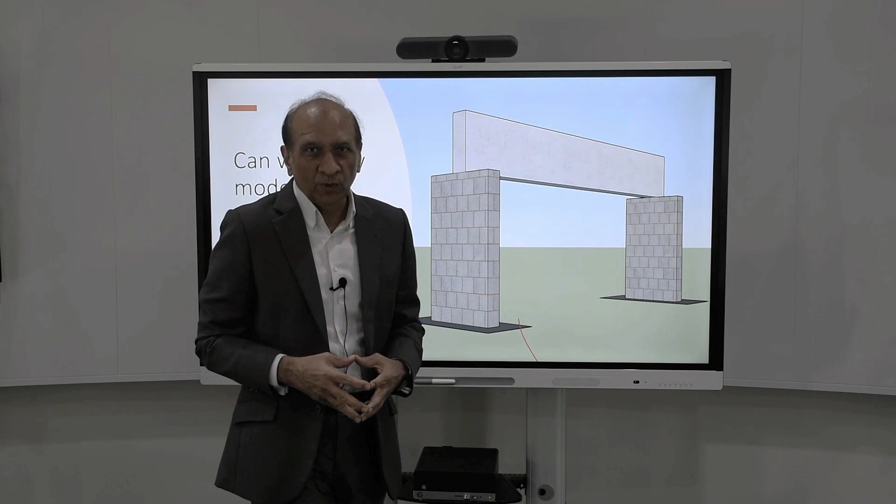You might say you don't need analysis or modeling to determine the response of this structure. I can do it by hand, by WL squared by 8 or WL by 2 or something like that. Completely true - we don't need computer modeling to solve this problem. But let's say if we had to model this structure completely and properly, what would be the challenges?

First of all, we would like to model this structure realistically and calculate its behavior for different excitations, not just for vertical load. So let's see what we are talking about in that context.

So basically, we would like to represent the materials realistically. Now this is a reinforced concrete beam - we have rebars in there, we have the two different materials put together. We have a masonry wall, which is made of brick blocks with mortar in there and so on. We have the supporting system, foundations. So can we model all of those materials realistically?

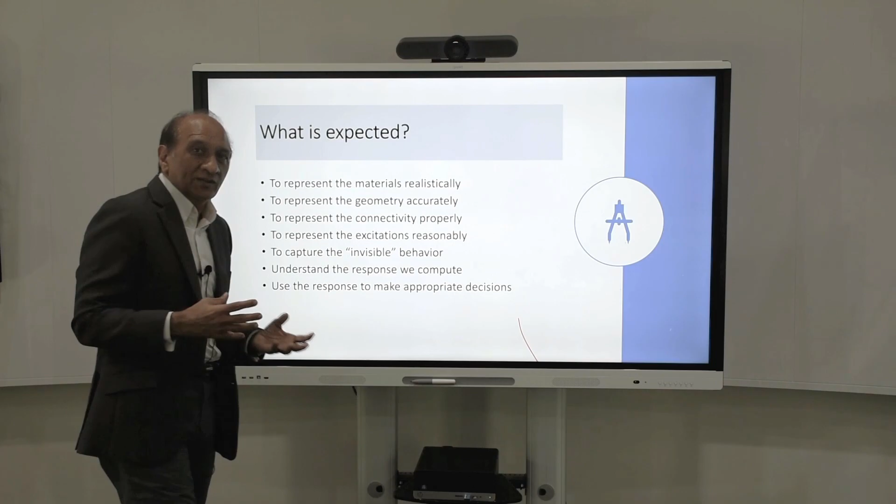Can we represent the geometry correctly, realistically? That means it captures the behavior. Can we represent the connectivity between these elements? How is the beam resting on the walls? What is that connection?

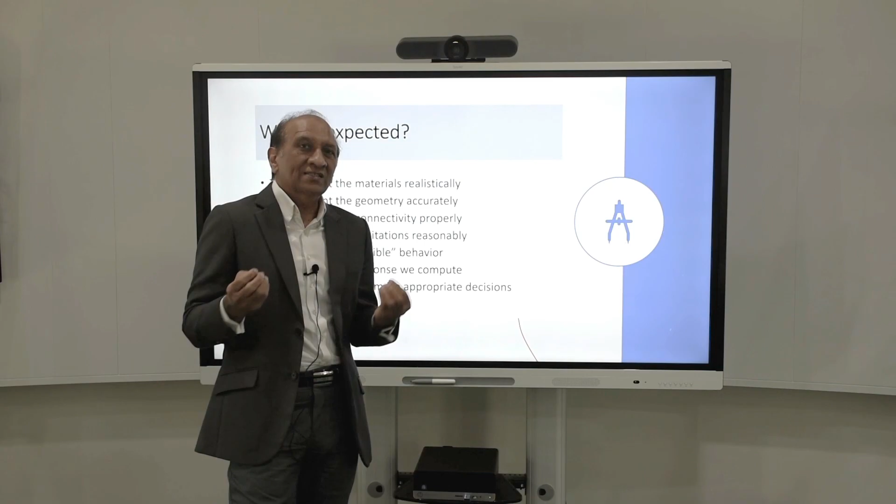Is it pin? Is it roller? Is it spring? What is it? How do we represent that simple connection where the beam is simply resting on the top of the wall? How do we capture the invisible behavior, like friction between the wall and the beam, or the sliding of the beam, or falling off of the beam? How do we do that? And then how do we understand the response that we will compute and make some decisions that are useful?

So let's get into it. Let's see, number one, the simplest case: where we have a vertical load on the beam, and how do we calculate the response for a vertical load? That is obviously the simplest case.

What anybody will do is take this beam and put it on a roller and a pin support. They will model it like that, apply the vertical load, and then easily calculate the bending moments and even deflections and shear forces and all. There doesn't seem to be any problem with that. But look at the first problem.

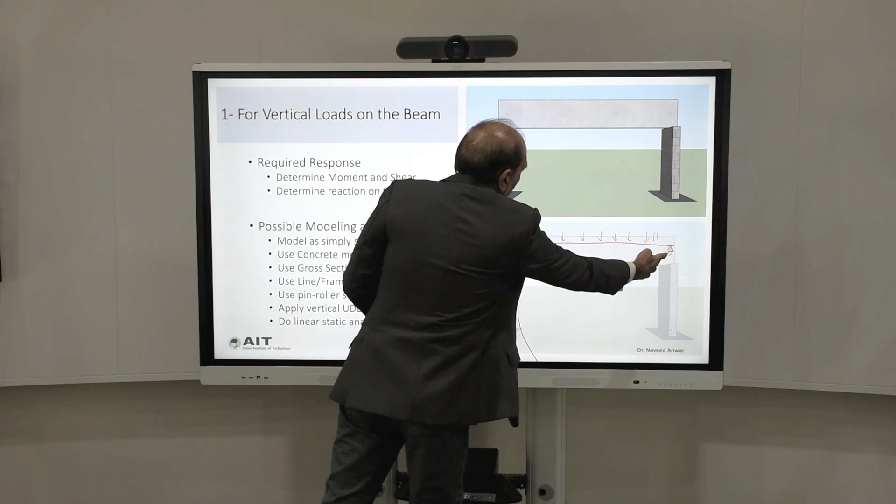When you model it, you model the center line of the beam, which is actually far from the real support of the beam. It's not the same location where the beam is in contact with the wall. So you're modeling a beam center line which is already away from the real support, and that will start creating problems in our modeling.

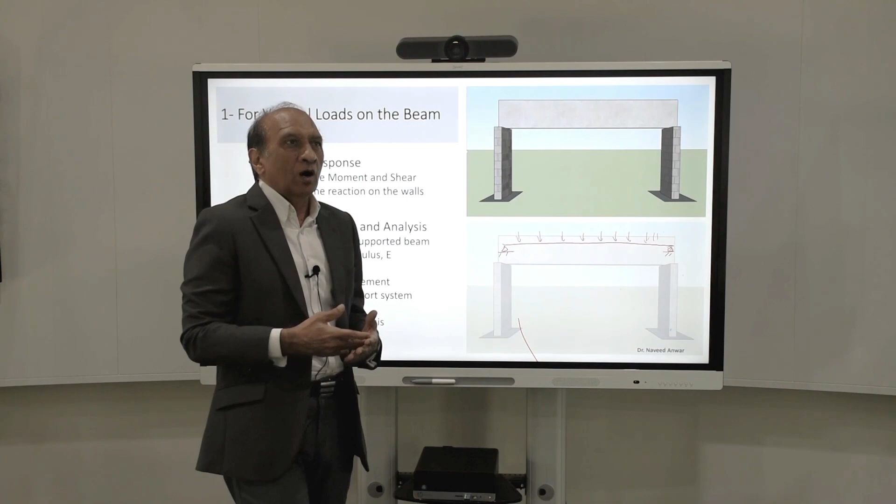But okay, let's forget that for a minute, and we can do this model and get the response for the vertical load. So we use the concrete modulus of elasticity, use average modulus, neglect the rebars, just assume it's concrete. And we use the initial elastic modulus, or tangent elastic modulus, or do we use the secant elastic modulus? There are many options there, so we have to make a choice on which elastic modulus we will use even at this point.

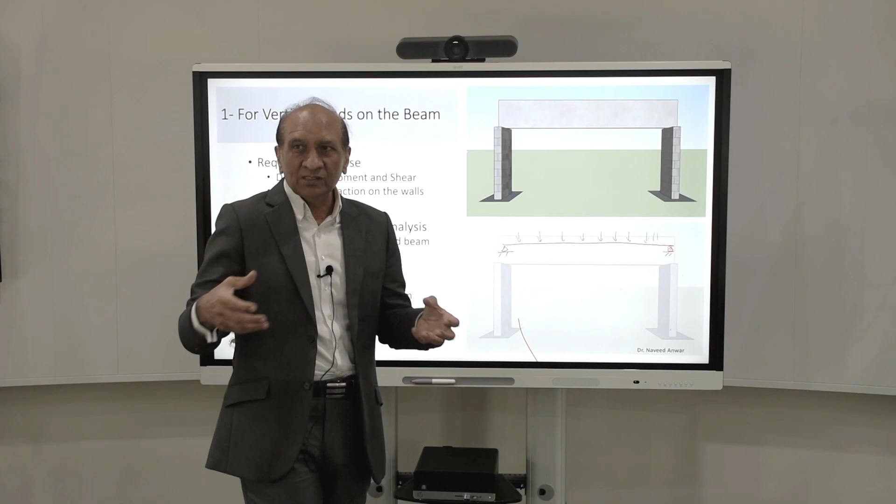And then do we use gross cross section, or do we use the cracked section? Because when you apply the loading, the beam will crack, and the cross section will change along the length. It will crack more in the middle, less close to support. So which cross-section properties should we use for calculating the response, the deflections, for example?

Let's say we use the line element or a frame element to model this one, and like I said, we put it on two supports, one roller and one pin. Which side should be pin and which side should be roller? Because in reality, both the supports are identical. The beam is just resting on the wall. So you are arbitrarily saying that one is pin and one is roller. Which one is which and why?

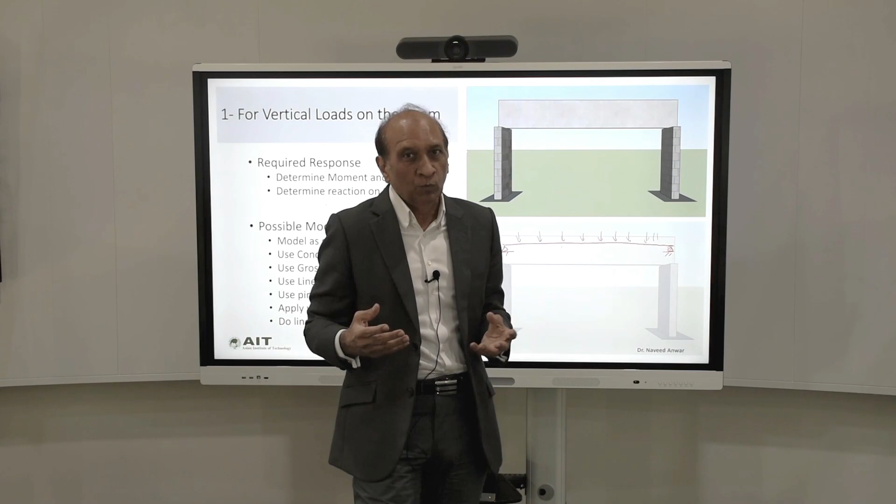So we'll come back to this again. Then we apply a vertical load with a UDL. Again, whether it is applied at the top, at the bottom, or the center line, that's a question, but let's say we assume it is applied at the center line. Then we can do a linear elastic analysis and get the response. It's a simple thing, but as you can see, we already raised many questions here.

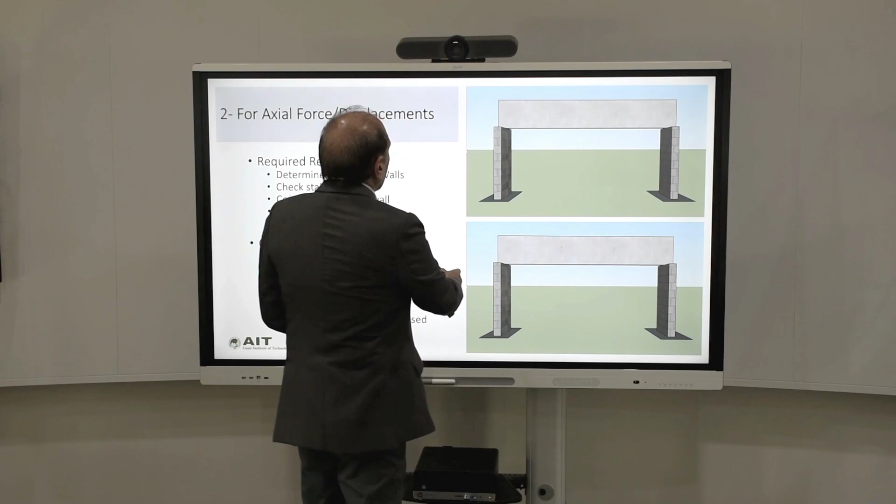Let's go to another case, next step. Let's say that the load is not vertical. Let's say now that the load we are talking about is actually a horizontal load or a horizontal displacement. For example, there's a load coming from this side because of any reason, maybe it's earthquake movement, or there is a temperature change, or there is shrinkage in the beam, so it is causing deformation in the beam, axial shortening or expansion. Now what do we do?

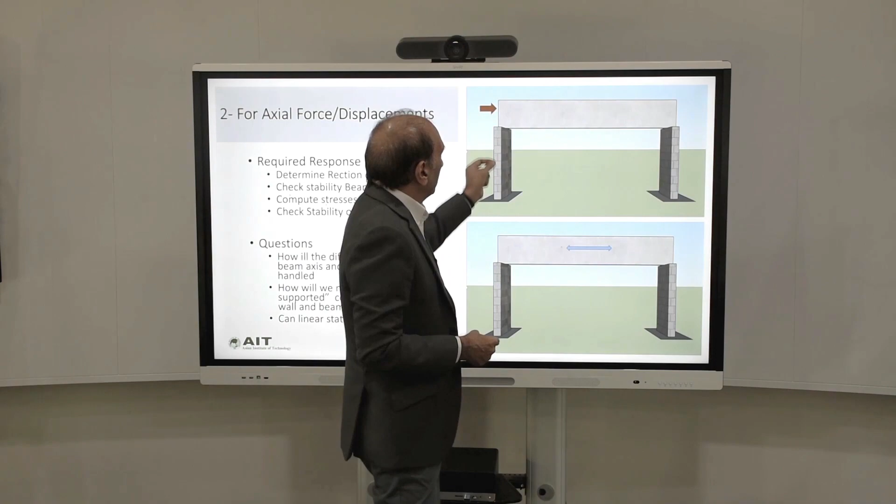Will that model that we just made work? For one thing, if we use the pin and roller condition, then if we have a pin on this side and apply the horizontal load, that pin will absorb the load and it will not go to the other support. But we know very well that the horizontal load from this beam should be shared by the two walls. How will that happen? How will we model that? If you use pin here, roller here, then we already are in trouble.

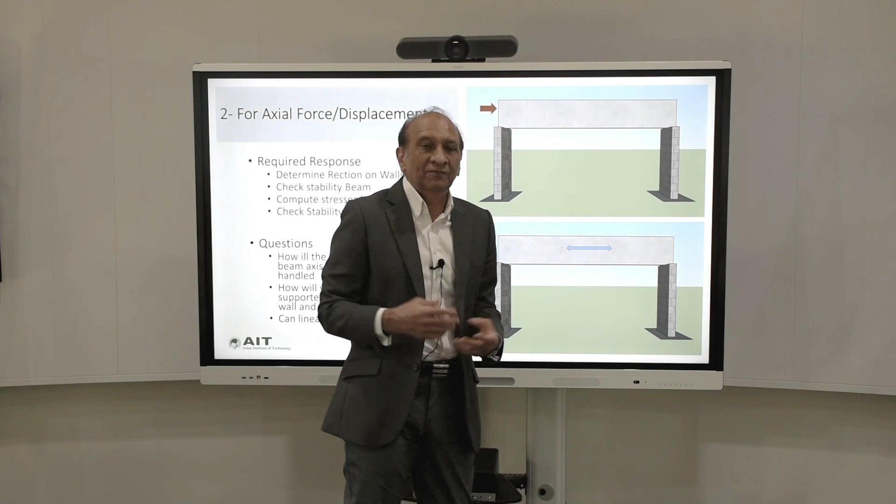If we use both rollers, then we again are in trouble because the beam will simply slide off the walls and we will not get any reactions. What about when we have thermal expansion? Then the beam is supposed to expand on both sides. What will it do to the wall? What kind of reactions will be induced? So will the walls provide enough restraint or will they not?

So all these questions start to come up when we simply change the direction of the loading from vertical to horizontal. And now we cannot really model in a very simple manner without making several assumptions. Let's go one more step.

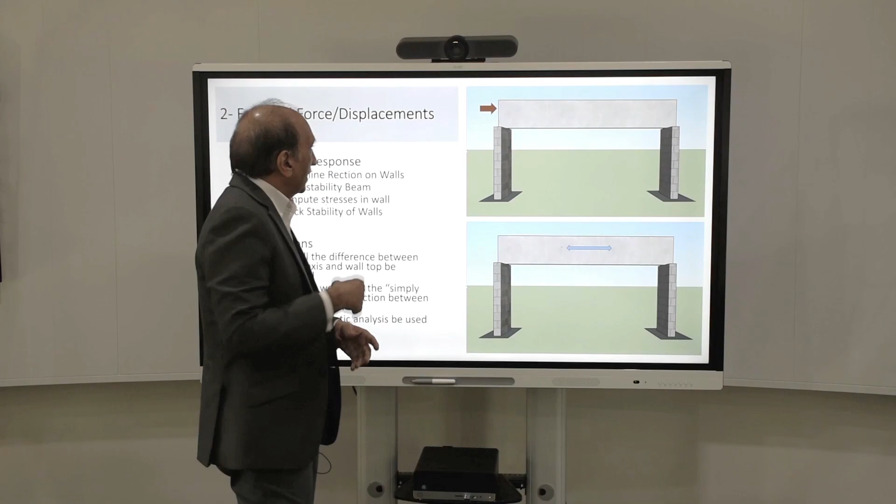Let's say the beam is like this one, we're looking from the side, and there's a wind blowing on that side, actually trying to topple the beam. So there's wind pressure coming from the side.

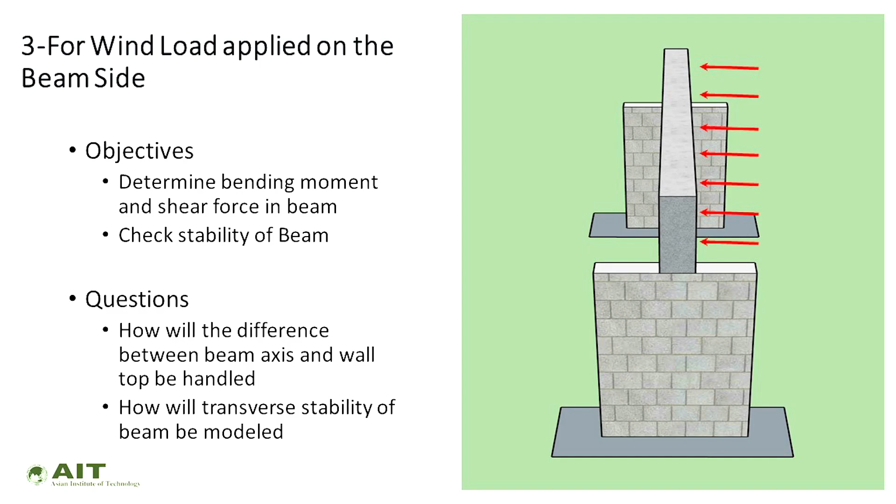Now we have a completely different problem to solve, because the centerline model we made last time may not be relevant anymore. The beam centerline is here, the support is here, so we have a gap in between. Also in reality this beam might topple and overturn over the wall, but our centerline beam model will never tell us that can happen, because it represents the beam at a centerline supported on both sides, so it cannot topple or rotate that way. Even if it can rotate, it can only rotate about the centerline, not about the top of the wall, which is far from the centerline.

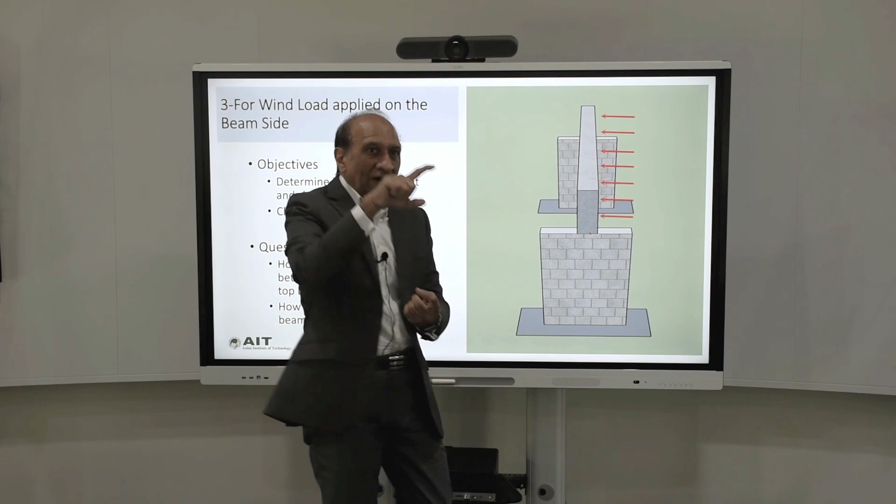So that means our traditional simply supported roller-pin model will not work in this case, and we need to go beyond that. There are several issues that have come up just because we changed the loading. That means we cannot use the same model for different loadings, which should not be the case. In an analysis program, when you make a model, you apply different loadings to the same model, but in our case we can see that it will not work.

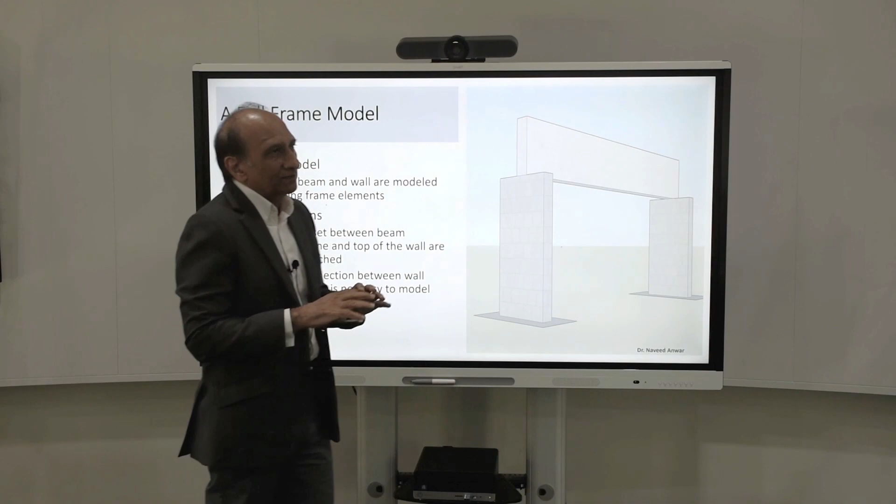Let's say we realize that a simple centerline beam on roller and pin support may not be sufficient. Then what options do we have? Let's go to a computer program and model it as a frame — representing one wall as a vertical column, the other wall also as a vertical column, and the beam as a frame connecting them.

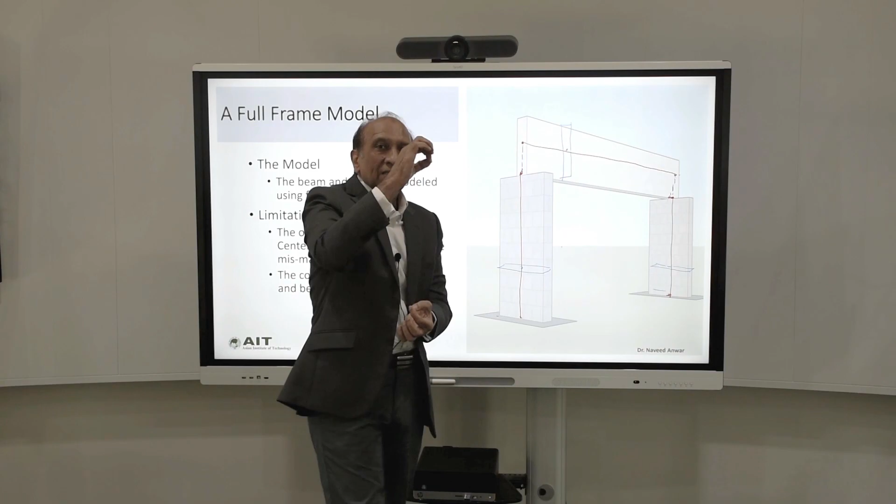But the first problem again is that the beam will be modeled at the centerline, while the walls end here, so there's going to be a big gap between the centerline of the beam and the supports where the beam is actually resting. So we have this offset between the centerline and the supports, which creates a problem.

Either we lower the beam down so the centerline comes to the top of the wall, or we raise the walls up to match the centerline. Both of these are incorrect because they alter the physics of the structure. That means our frame model now has some challenge.

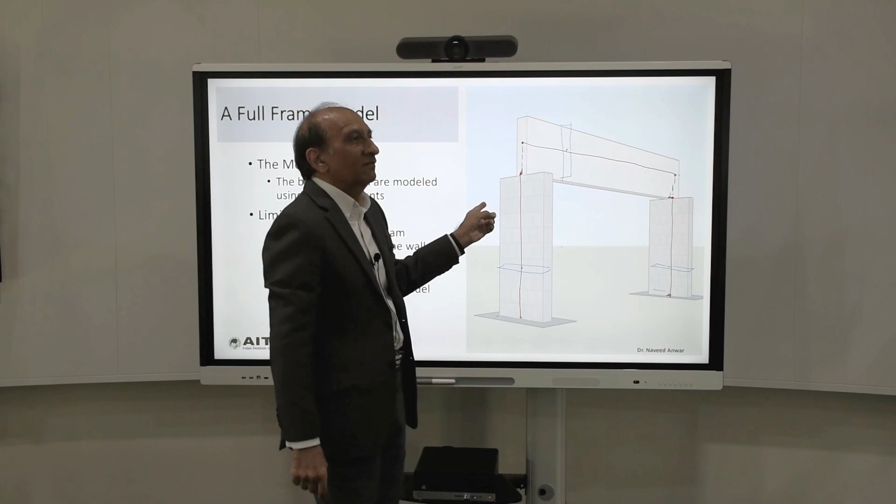Obviously, there could be many ways to solve that — we'll come to that in a minute. But you can see that even creating a simple frame model for this example runs into trouble right away.

Let's go to another option, a frame-shell model. If the wall is very long, instead of representing it by a column, we can create a shell model of the walls to make it more realistic, while the beam is still represented as a frame, and then we try to connect them.

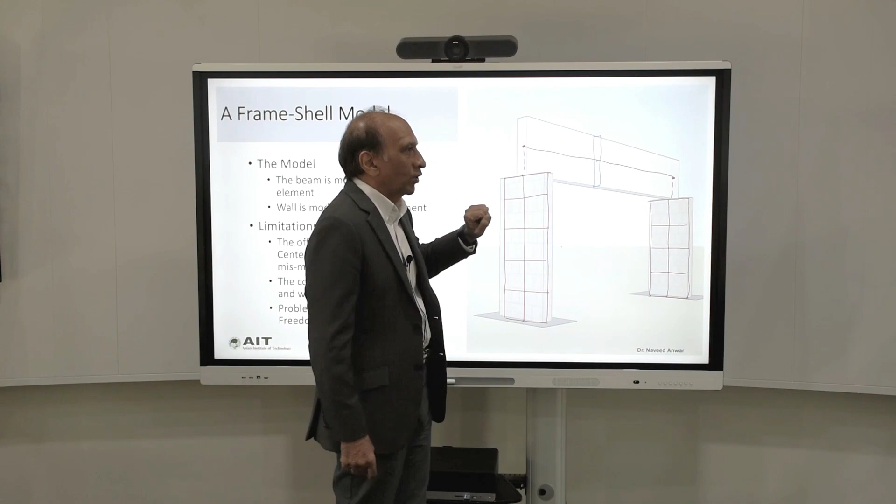But that does not solve our problem, because there is still this difference between the beam centerline and the top of the wall. That gap is still there, and we need to do something about it. This model will be slightly better for the walls, but it doesn't solve the problem for the beam, and especially doesn't solve the connection between the beams and the wall.

But at least now we know we have an option of doing a simply supported single member, an option of doing a frame, and an option of doing a frame and a shell.

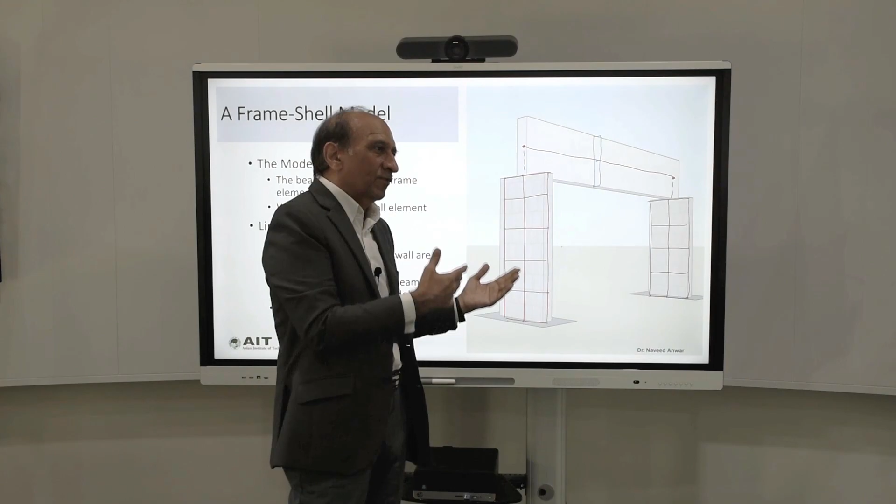Let's say we want to create a complete shell model. Another option is that we go one step further, and we say we will represent the wall, which is a planar structure, by a shell element. We will also represent the other wall by shell, and we also represent the beam as a shell, because the beam has a depth, so we can model it as a shell.

Now we have solved a few of the problems, because the first problem we solved is that the connection or the support of the beam is now actually on top of the wall. So that gap problem or geometric inconsistency has been resolved, and we can place the beam exactly where it is and model the geometry reasonably.

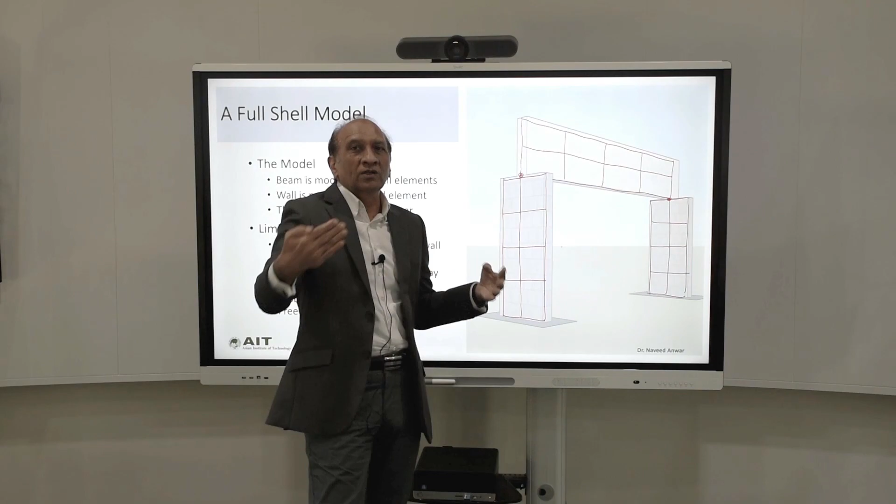But several other problems we have not solved. We have not solved the problem of the gross cross-section of the materials, and we haven't solved the problem of the connection between the beam and the wall yet. But geometrically, the model has started to look better, right? And we can have a good physical sense of the structure.

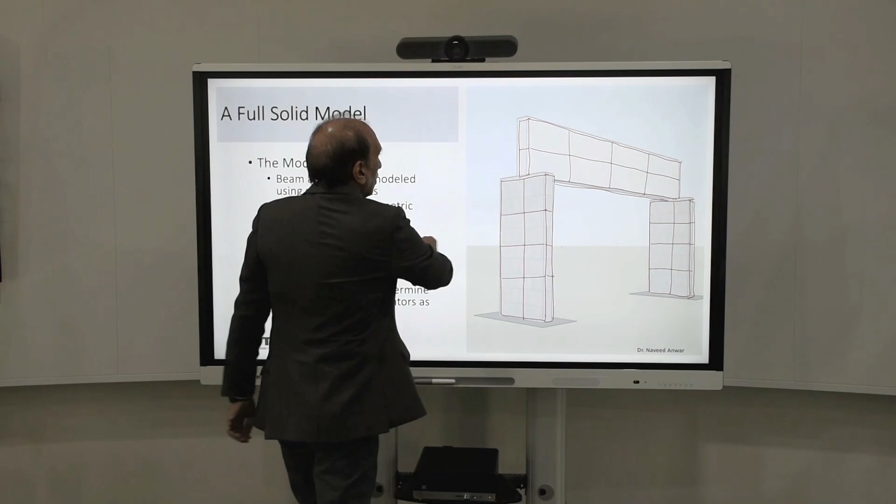Now let's go to the next step. We say, let me model the whole thing as a solid, because in the previous model, if I go back, we still have a thin shell resting on the wall, and it doesn't have stability in the transverse direction because of something called the orphan degree of freedom problem. When the degrees of freedom of one object do not match with the degrees of freedom of the other, some degrees of freedom are orphaned, so the connection will not be fully established.

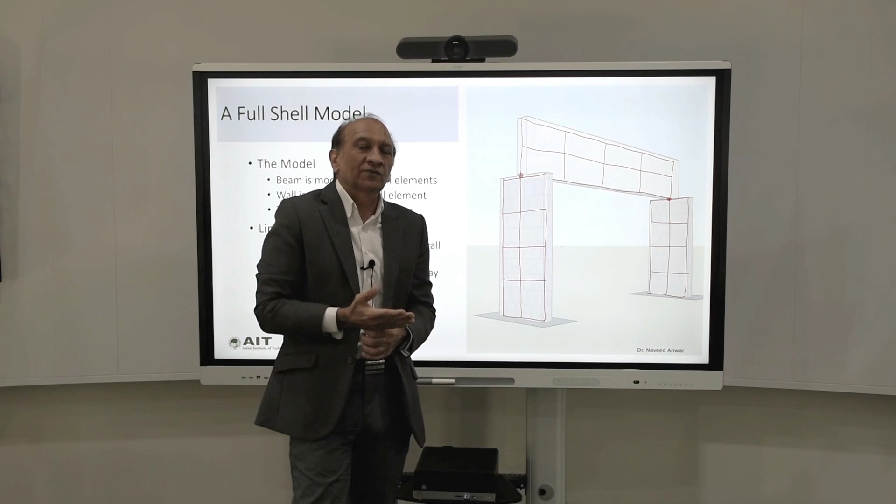So to solve that and other problems, we could say I'm going to model everything as a solid element. In fact, mechanical engineers normally always model their structures as solids because they physically correctly represent everything. But in civil and structural engineering, we normally make a lot of assumptions and simplify the structures. So now we have a solid model.

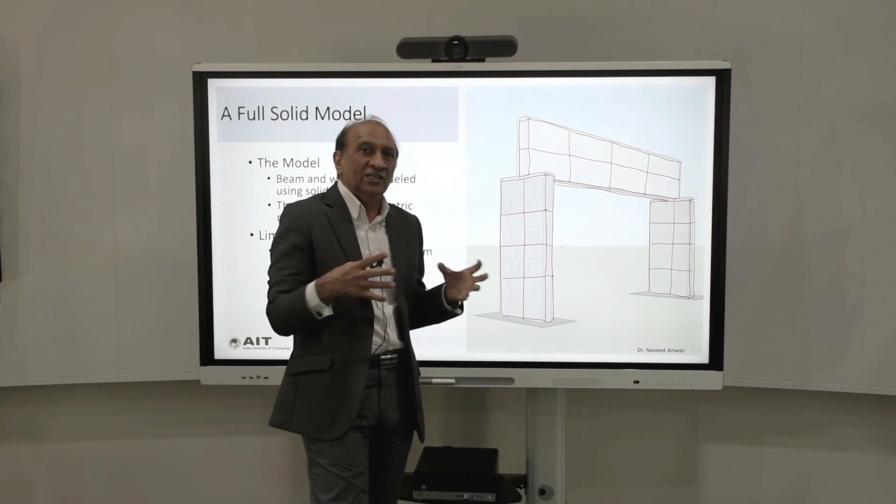That means the wall is physically correct, the beam is physically correct, the beam is really sitting on the wall at the correct location, and the dimensions are now correctly modeled. If the beam is wide, it will be more stable; if narrow, less stable, and so on. Same is the case with the walls. So geometrically it's a very good model because changing the cross-section will not change the results or the assumptions—it will just be correct.

But the problem of the connection between the beam and the wall is still not addressed. And another problem we've now created for ourselves is that it is not easy to calculate the bending moment in the beam anymore, because the solid element will not give us the bending moment and shear as we normally get from a frame element. Now we only get stresses, and those stresses have to be integrated and converted back into bending moments, and they aren't useful for reinforcement design directly.

We will have to do a lot of processing to get a sense of what reinforcement we need. Also, it will be very difficult to induce cracking or incorporate reduced stiffness into the solid model, because in a beam we can simply modify properties by changing the property modifiers in shear, torsion, axial, and bending independently of each other—there are 6 stiffnesses we can modify to get the behavior we want. In a solid, we don't have that opportunity anymore.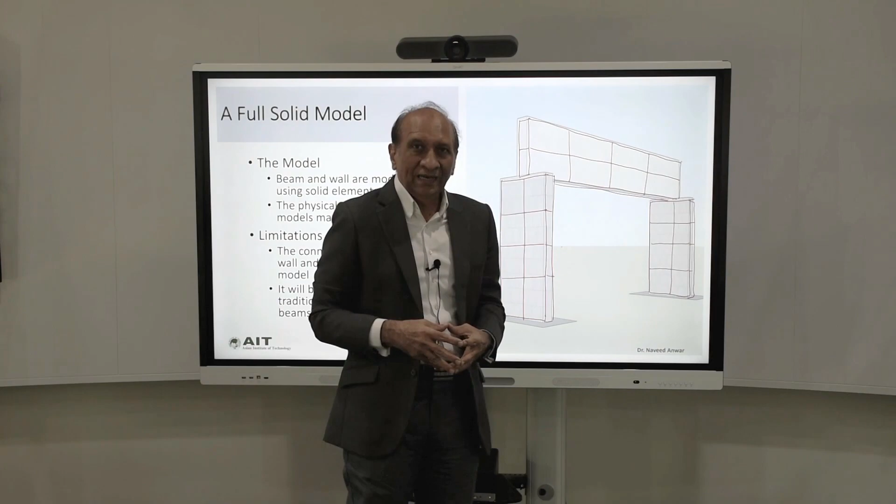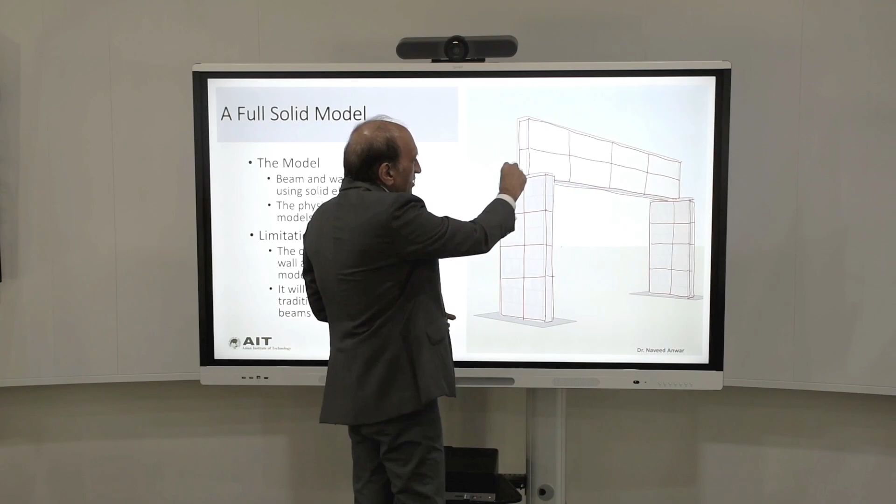It's more or less complete. So even though we solved the problem of the geometry, we created problems in result interpretation, and also in modeling the properties or modified properties. So while each model gets better in one direction, it gets worse in the other. And especially we haven't solved the problem of the connection between the support and the beam, because if you just connect it rigidly, the results will be very different from what we really expect.

So if you look at that in SAP, for example, you could make different types of models for the same thing. This is a simple beam—I represent it in an extruded form. This is a beam centerline on wall, beam on shells, and then different models of shell on shell and full solid models. You can create them in SAP if you like. For this simple structure, we can have several options, each with some disadvantages, and they can all handle some loading and cannot handle some other loading.

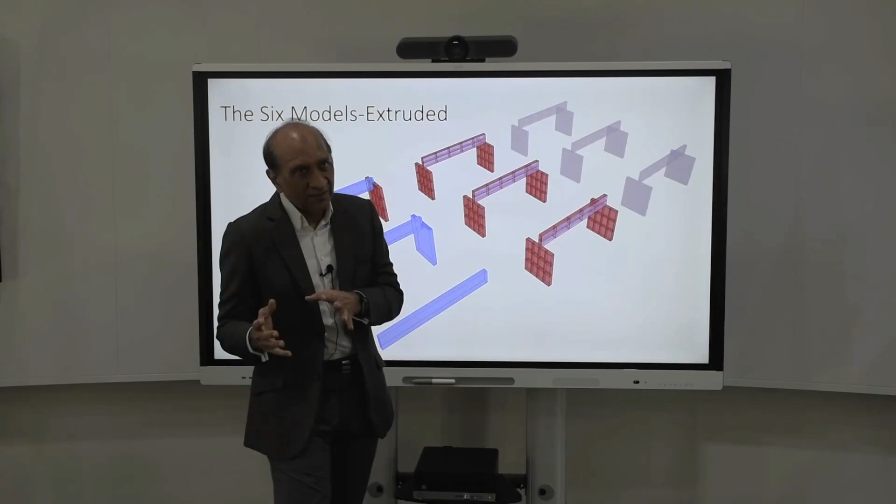So none of the models is actually really solving the problem that we started with, and we started with a very simple problem of a beam on two walls. What can be simpler than that?

What we have learned so far is that even with a simple problem, it is very hard to model everything as we want, unless it's a thesis or master's thesis where we're only doing this for 6 months or 1 year. But in a design, we have very little time to do that.

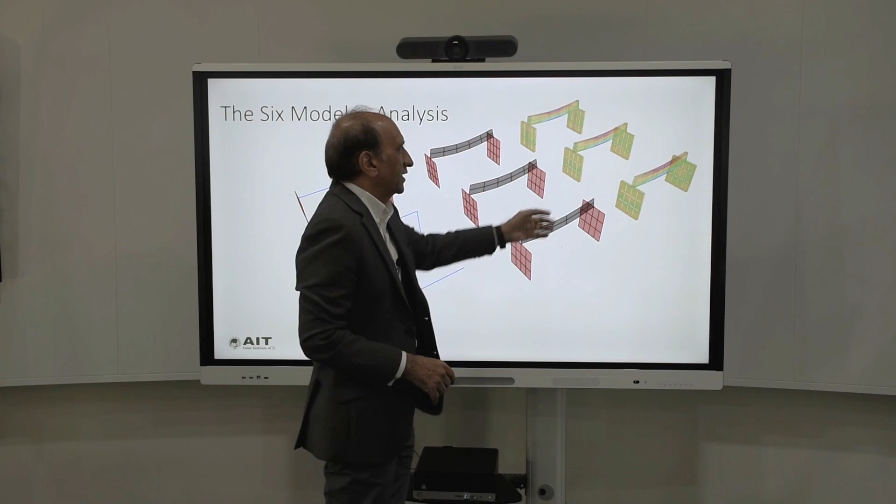If you just look at the models, they will all have different responses. Some will give you bending moments, some will give you stresses, and you can see solid models of different kinds where we try to solve many problems of the beam going to the end, not going to the end, and so on. If you look at one parameter, the deflection in the center of the beam, in different models you get different answers.

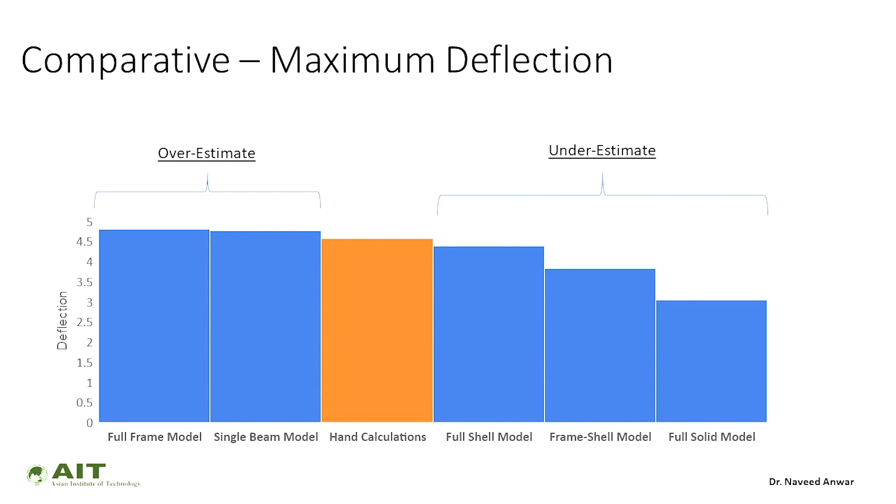Every model is giving you a different value of the deflection in the middle. If you just use the manual calculation, some are higher, some are lower, and the variation is quite big. So the question is, which model is right?

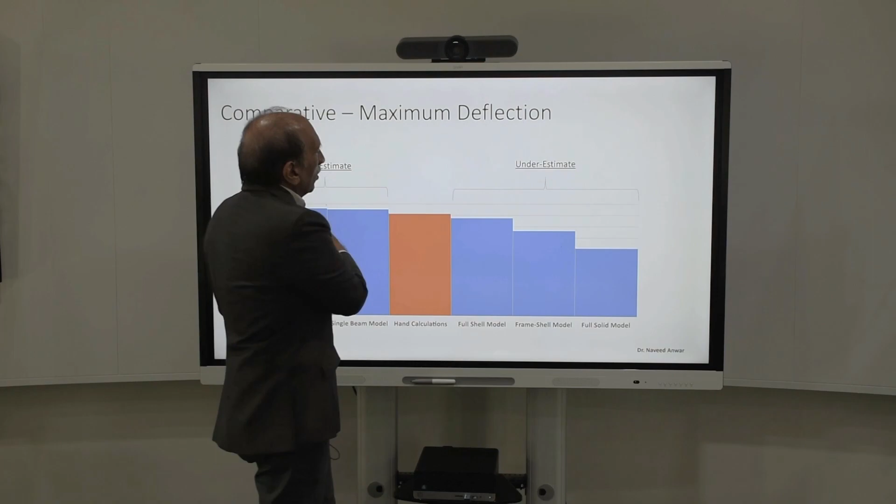In this particular case, actually none of them is right, because in the deflection of reinforced concrete, we have to incorporate the cracking and the effective stiffness because of the reinforcement, and we have to incorporate the long-term loads, the shrinkage, the creep, and so many other things that none of these models can handle so far. We might get some of the forces right, but we didn't get the deflection right.

We didn't solve the problem of the connection between the beam and the wall yet. We only have a few options: either it's a hinge, a pin, or a roller, but the real connection is a sliding member resting on top of the wall. So how do we do that?

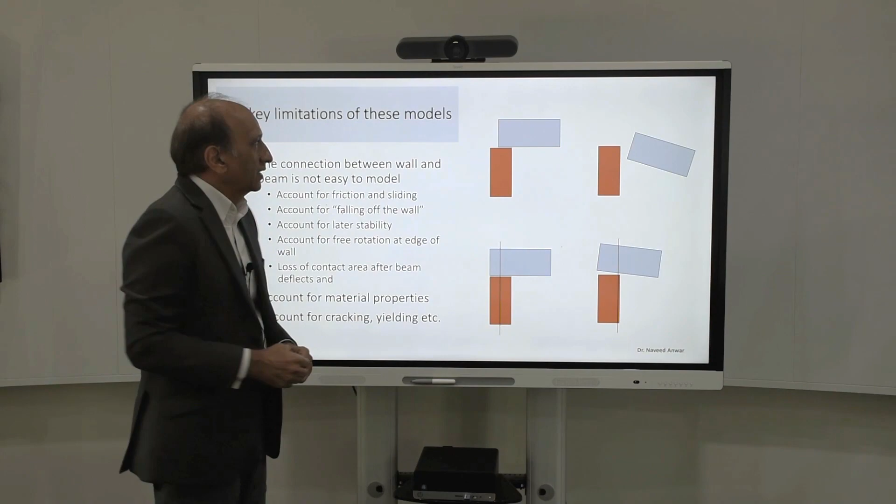That brings us to some other problems we actually did not solve. First of all, like I said, the beam can slide on the wall, and we didn't incorporate that in our modeling - sliding, friction. The beam can actually fall off from the wall, but our models will never show us the beam falling down, no matter how much load we apply. The beam will always be resting, always be connected, unless we use really advanced modeling.

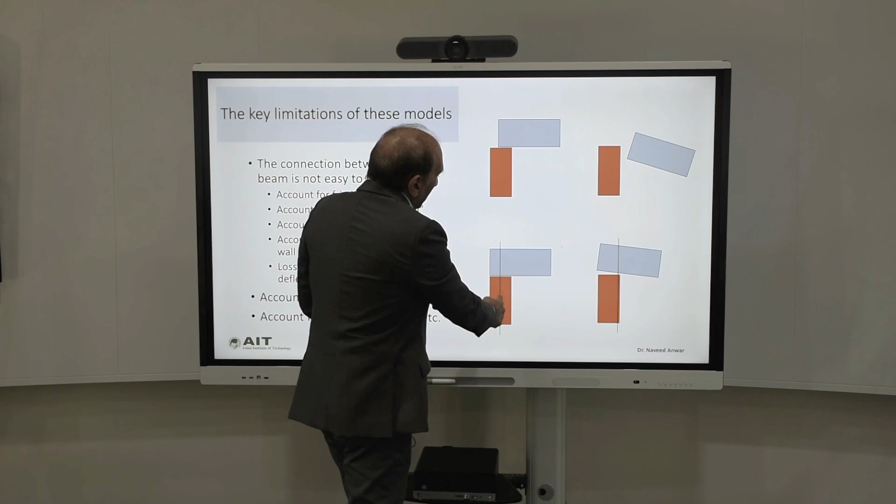Then the other problem is when the beam rotates, we assume that the beam is resting on the centerline of the wall, but actually when it rotates, it's on the edge of the wall, not on the centerline. That means the span we assumed is also not correct. And that rotation at the edge of the wall will change the reactions, not from the centerline but to the edge of the wall. We just didn't capture those things because we assumed we were modeling at the centerline, with a pin and roller at the centerline.

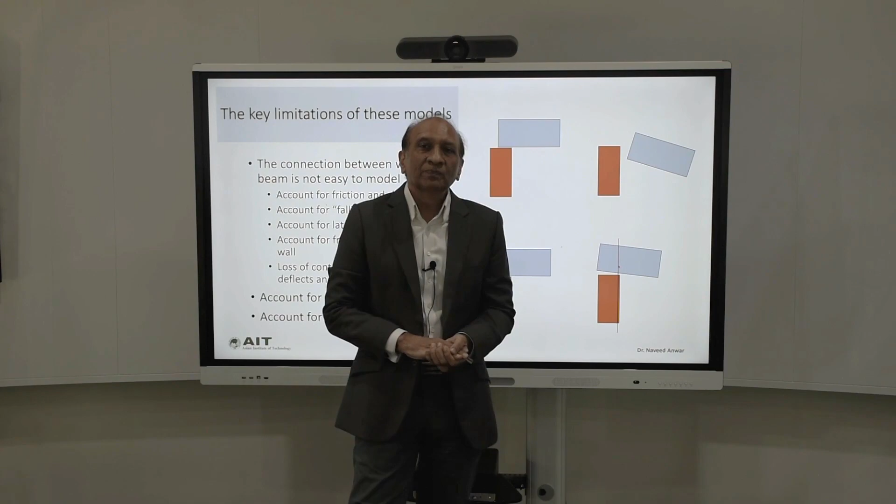If the wall is very wide, this could be a big difference. Let's say the wall is half a meter on each side - your span estimation will be off by half a meter. Deflection, moment, everything will be off by that. Some people will use clear span, some will use centerline span, but what is the real span, we don't know. The stresses around the edge of the wall could be very high around this area, and this whole sliding behavior here we have not been able to capture properly either.

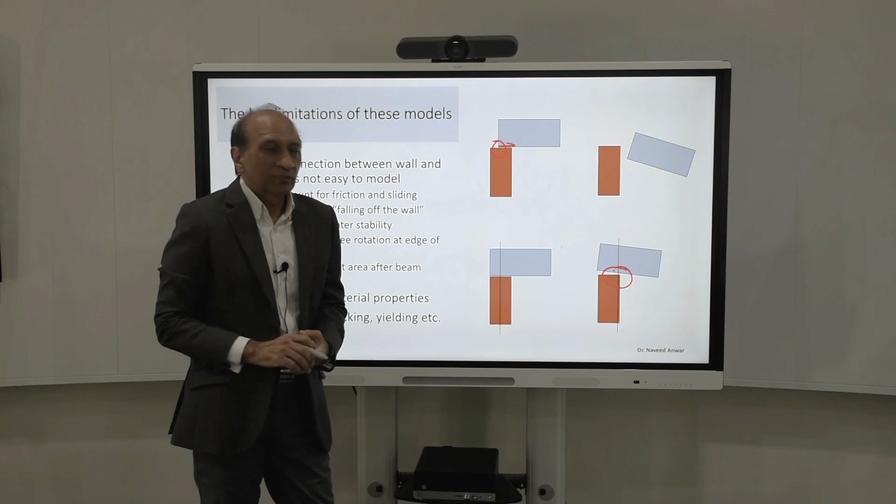To solve these problems, we have what we call behavior elements. Because we could not solve this problem by physical modeling - no matter how fine we made the modeling, for example using solid elements or shell elements, we still could not capture the behavior we were trying to capture because so many things we couldn't model. That's why these behavior elements come to our rescue.

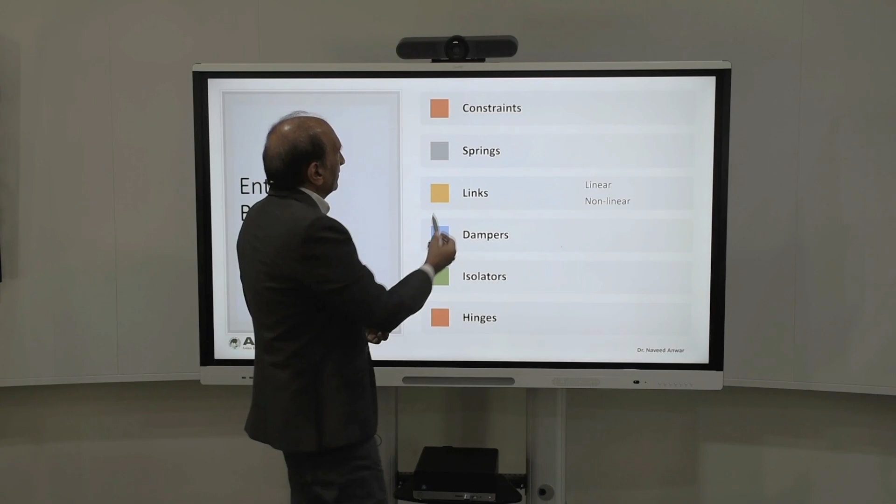Behavior elements include constraints. Constraints could be used to model the offset between the beam top, and we could use rigid links. We could use springs, links, dampers, isolators, hinges. Links are the most powerful of these elements - they could be linear or non-linear.

By using links, we could model the friction between the wall and the beam. We could also model the nonlinear falling off, and by that we could model lift, uplift, and many other things. So by using the appropriate links and other elements, we could actually model many of the things that we missed. By combining a good physical model with good behavior elements, we could actually get close.

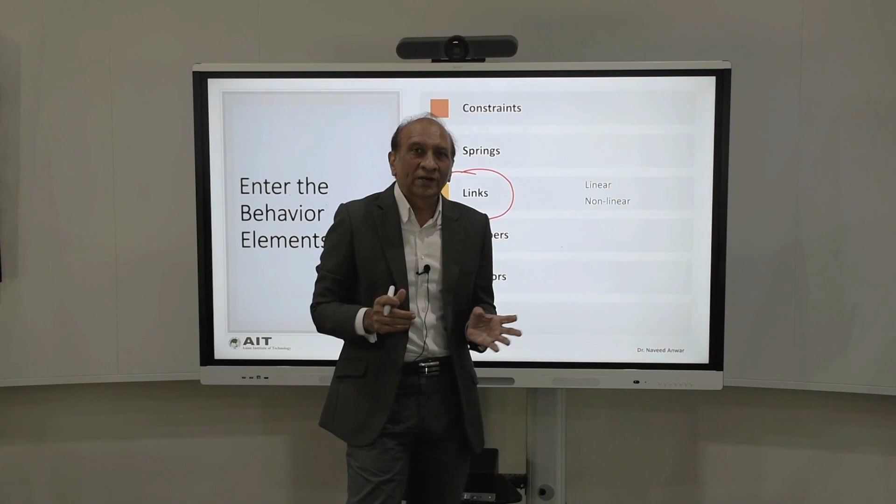But it's a lot of work for a problem as simple as that, and I'm quite sure nobody will actually spend that much time for a beam resting on walls.

What is really missing? And if you really think about it, almost everything which is realistic in a real structure or a real response is missing from this analysis. This is analysis that does not give us an in-depth picture of the response of the structure.

Real structure will be constructed by using the drawings that we make for it. The columns will have a finite size. There will be reinforcement, both vertical and horizontal. There will be ties, confinement, shear reinforcement, and everything will have some capacity, meaning there's a certain amount of moment that the column can take, or a certain amount of shear the beam can take, and so on.

A real frame will have finite dimensions, finite material properties and strengths, and a limited deformation and force capacity. So it might actually yield, buckle, damage, or break. All of this we cannot determine from the linear analysis we just carried out, because that will give us unlimited displacement for unlimited loads without any of these considerations.

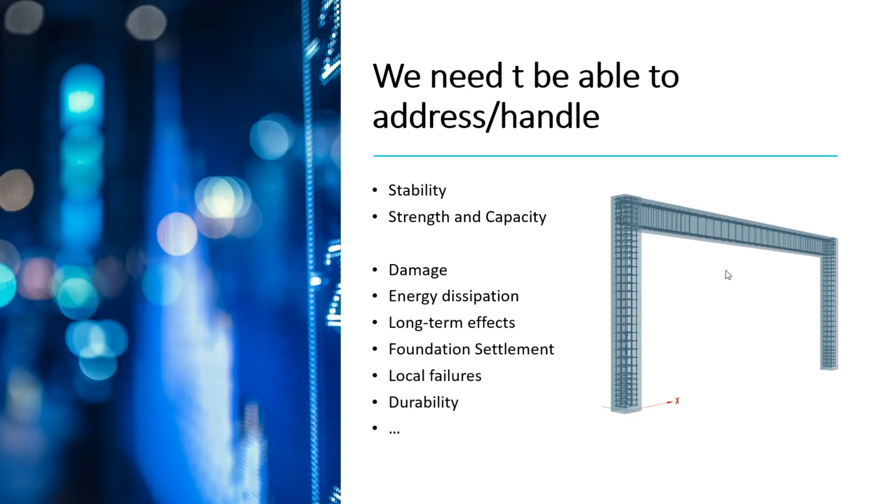So let's start with two items in the list, which is stability, strength, and capacity, and see how we can look at these. The first model, which is a stability-aware model, will be able to consider the global buckling of the entire structure as well as local buckling of parts of the structure.

It should also consider the P-delta, the moment magnification coming from local deformations, and the large P-delta, which is the moment magnification or change in deformations coming from the global displacement. These are the basic things that we should be able to handle.

We should also be able to handle foundation uplift, the type of foundation, fixed foundation, pin foundation. We should also be able to address overturning, sliding, and large displacement effects. So these are the things that we should be able to do in a model.

Let's start again with the first part which I mentioned on top and see how that will affect our response. Once we include the geometric nonlinearity in the model, we will include the global P-delta, which is the displacement increase because of large displacements happening. The moments will be magnified, and that will magnify the displacement further. So this P-delta effect, which is related to the lateral displacement of the structure, we can include.

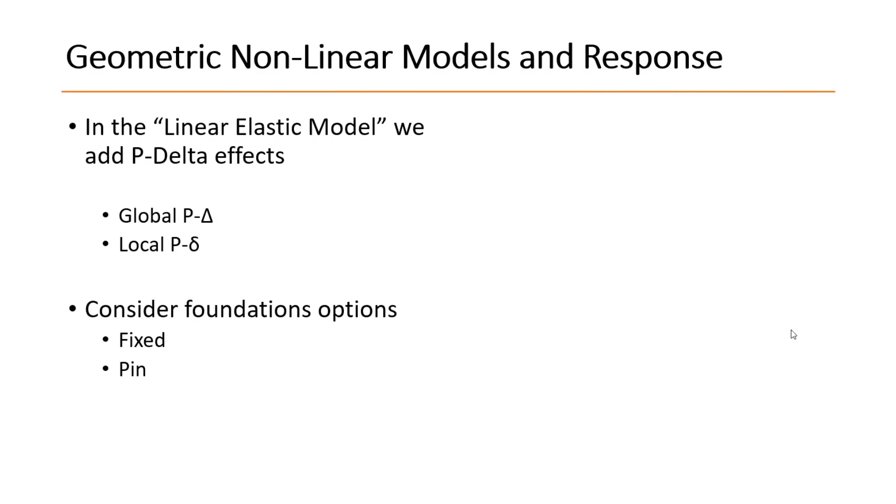The local P-delta effect of the column and beam will be very insignificant for this example, so we will not consider that. We will consider two options, fixed foundation and pin foundation, to approximately simulate different foundation conditions. If we do that, we get nonlinear response curves, not linear like last time, meaning there is a limit to how much load the structure will actually take.

We are not sure if the members can actually take this kind of load and deformation that we have shown here. So let's go to the next stage, the consideration of the capacity of the elements.

In this capacity-aware model, we should consider the reinforcement quantity, its distribution, the cracking of concrete, the yielding of bars, and the failure of concrete at a given strain value, or whatever criteria we fix for failure. Still difficult to consider are bond and lap splice considerations, anchorage of reinforcement, local failures in materials, and damage to members and materials due to repeated loading, and so on.

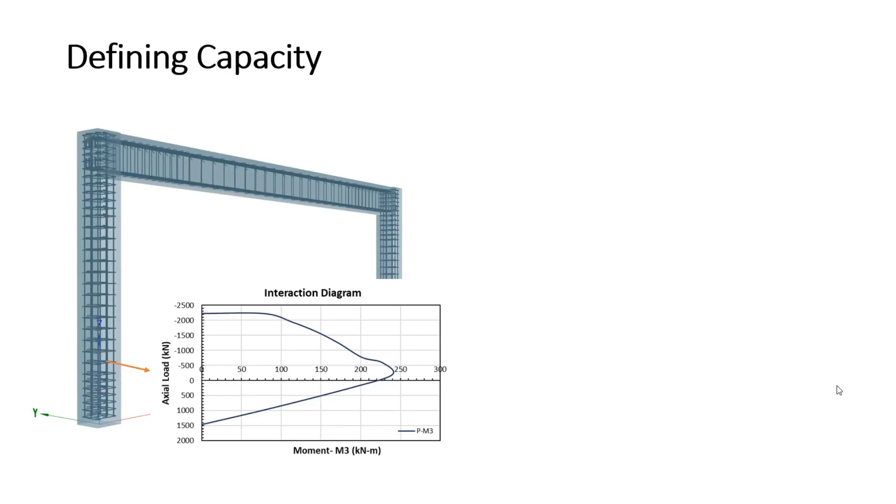For a column, we can create the interaction diagram between axial load and moment, and from that we can also determine the moment curvature for a given load level. Moment curvature we have already discussed a lot in another video, and the interaction diagram we will discuss separately very soon. These two important curves give us the capacity definition of the column, and this can include confinement effects as well as material properties, material strains, and so on.

Similarly, for the beam, we can determine the moment curvature relationship, which will define its capacity. We could also have a shear force versus deformation curve to limit shear failure, which we haven't considered for now in this example.

Using this capacity information, we can create a nonlinear model using plastic hinges, defining lumped capacity at specified locations where we expect failure to occur or capacity to be exceeded. We can also consider the stability effects we already looked at in the previous models—that is, P-delta—and we will use the fixed base for now.

You can use any analysis procedure; for example, nonlinear pushover analysis could be used to study this response. If we do that, we get a force-displacement relationship like this, with two curves: one with P-delta and one without. As you can see, without P-delta we have a higher capacity.

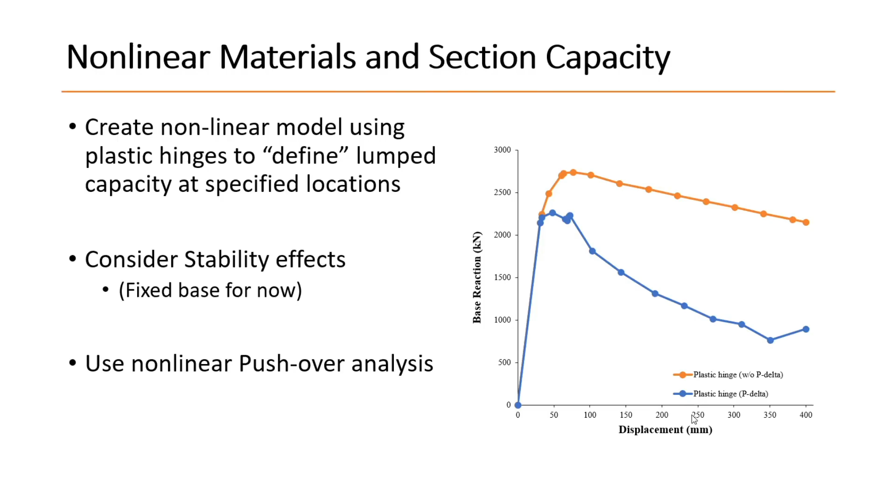Now that we have created the models which were linear, the models aware of stability, and the models aware of capacity, let's see how these models really compare with each other. Here you can see clearly that the linear elastic model we had first can give unlimited load capacity as the deformation increases.

This was not very realistic, so we added cracking, and the cracking model gave us lower capacity, but it still was not really going to fail at any point. It would continue to give that response forever. However, when we included the nonlinearity, the P-delta effect, we can see that the capacity was reduced quite a bit, and it could not go on as much as the linear models. When we started to add the capacity considerations as well, the load capacity of the entire frame reduced quite a bit compared to the linear elastic model. The structure will actually be failing very early on, and the linear elastic response will completely miss the realistic response from this structure.

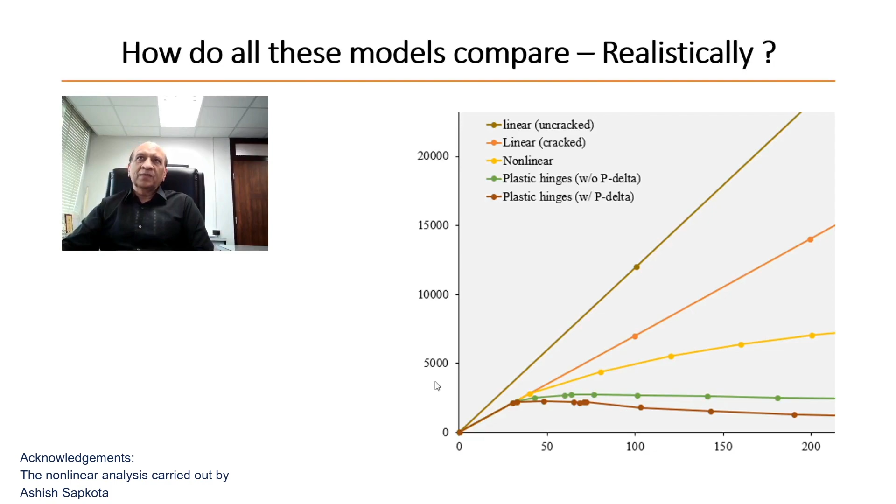First, let's look at the serviceability conditions. A lot of people consider a drift of 0.5%, roughly h over 200, to be a limit, which gives a displacement of 20 millimeters. If you compare the force capacities at 20 millimeter displacement, you find that more or less all of the models give the same value. That means nonlinearity and stability are not a concern at this low displacement level of about h over 200 or 0.5% drift. So we get a force ratio between the nonlinear, or real, response and the linear response of roughly 1, comparing the cracked section response.

When we look at the damage limit, a drift around 2%, often considered the point where seismic design becomes performance-based design and other things must be considered - this is a rather large displacement drift limit for frames of this kind. At about 80 millimeters of displacement, we get roughly a force factor of 3. That means the linear elastic response gives us a force value roughly 3 times the actual capacity of the frame when considering both section capacity and stability, or P-delta, effects.

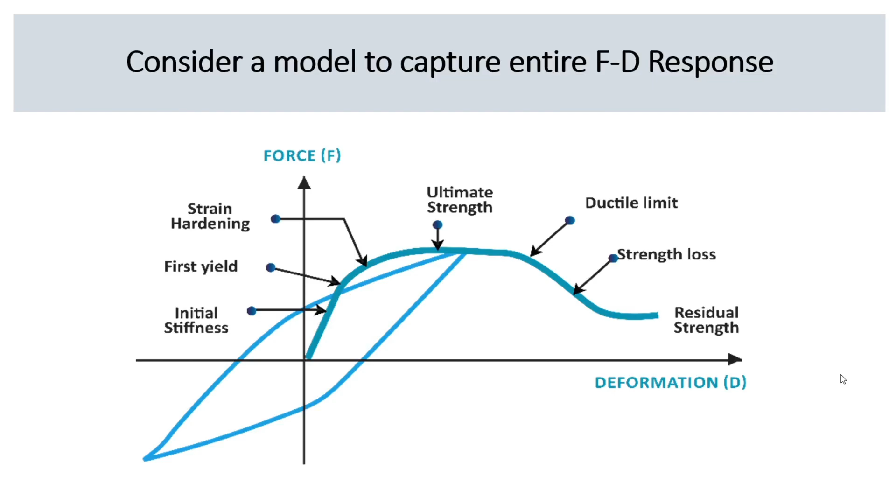We haven't talked about the foundation. In all the previous cases, we assume that the foundation will be some fixed support or a pin support. But let's look into that a little bit more detail.

To design the foundation, you will take that foundation, remove the fixed support, and replace it by a foundation. You will apply that load and bending moment, and then design the foundation. So when we analyze the frame, we throw the foundation away, and then we assume that the foundation is a fixed support. Then we calculate the bending moments and the loads, assuming it's a fixed support.

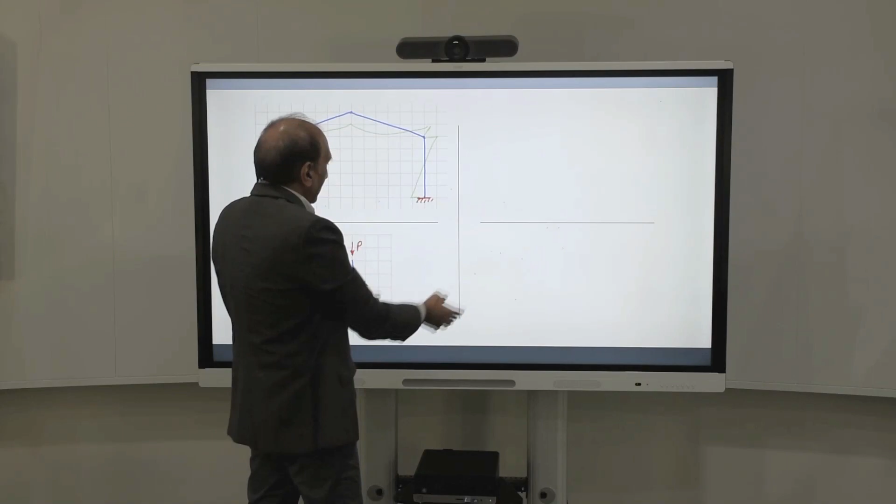Then we remove the structure, throw the structure away, and we bring those forces to a footing which is actually not fixed. This is capable of rotating, capable of settlement, capable of deforming, capable of doing everything. It is far from fixed. But that's what we assumed. So we got the forces assuming it's fixed, and now we are trying to design a footing which is not, and we are applying the same forces on that. So we are actually

over-stressing the foundation unnecessarily. Now let's go to the other side. Let's say we say, oh no, this is not good, it should be pin. We start with the pin assumption. Then we will only get vertical load and no bending moment. And we say, oh, I did a very good job, I reduced the size of the footing because now I only apply vertical load, no bending moment. So the footing will become much smaller.

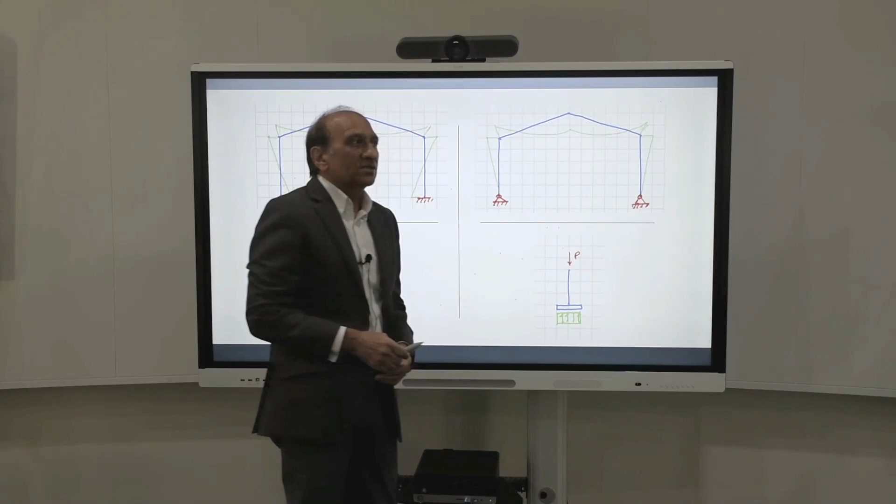But reality is that the column is not a pin here. The column is actually connected to the concrete footing with bars and anchors and whatnot. So in both cases, we are making an error of judgment. In one case, on the conservative side, and in one case, the unconservative side, depending on how we look at it.

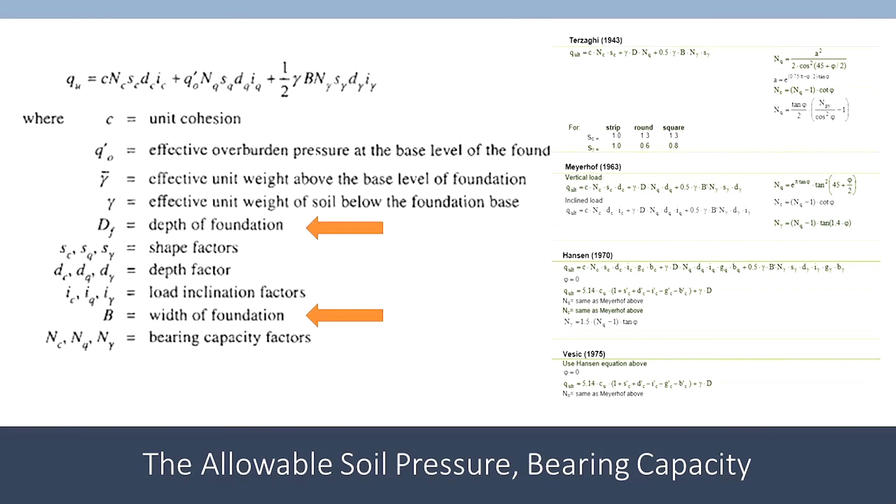Then, another problem: if you look at the formula for calculating bearing capacity, you will find that there are two things needed: depth of the foundation and width of the foundation in some of the old formulas. This means that before you can even calculate the allowable bearing capacity, you need the dimensions of the footings, and that is what we are trying to find from the analysis. So it is also interconnected. Of course, you can get graphs and so on to improve this process.

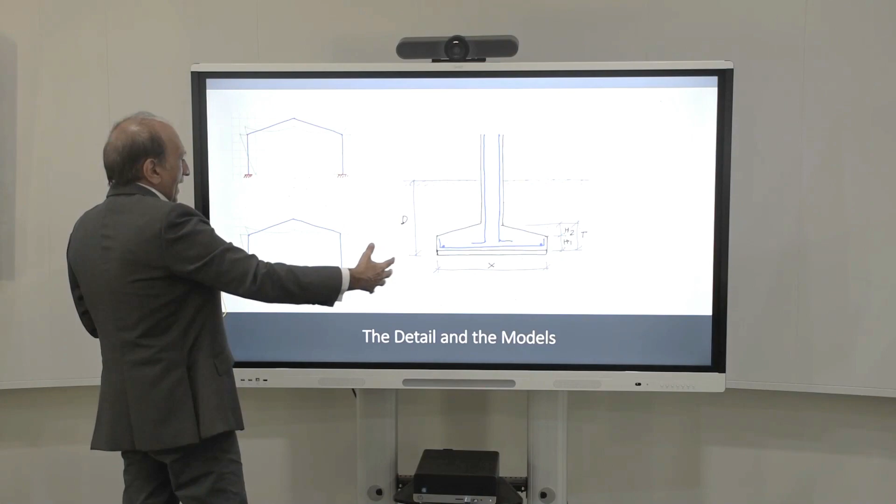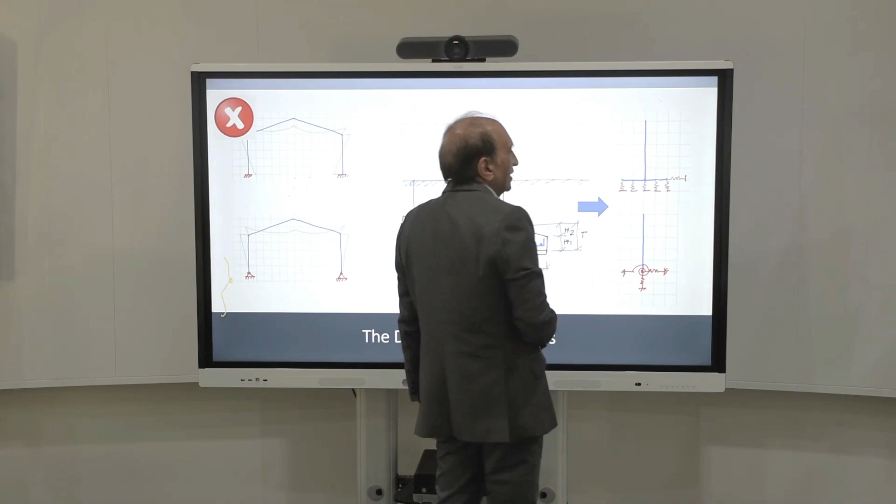What we need is a model which is something like this, which can represent the rotational capacity of the footing, the vertical settlement of the footing, the horizontal movement of the footing. It can not only capture the deformation in the footing slab itself, but also the deformation in the soil below and around that. Which means we can create either a spring model like that, or a spring model like that. Either way, we can represent the footing. So basically, this model should be actually applied here.

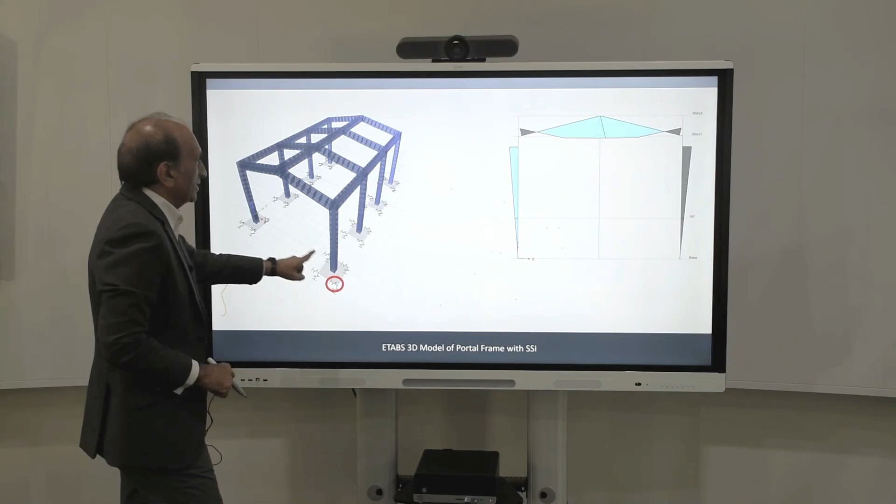And if we can do that, then we are a little bit closer to reality, or a little bit closer to consistency, I should say, if not reality. That means the two are at least consistent. The forces that you're getting in the footing and the structure response are at least compatible, not incompatible. So this is not really right, this is probably a little bit better. I wouldn't say right. And you can see that if you model a structure complete with footing and springs and everything, rather than fixed or pin support, you get different answers.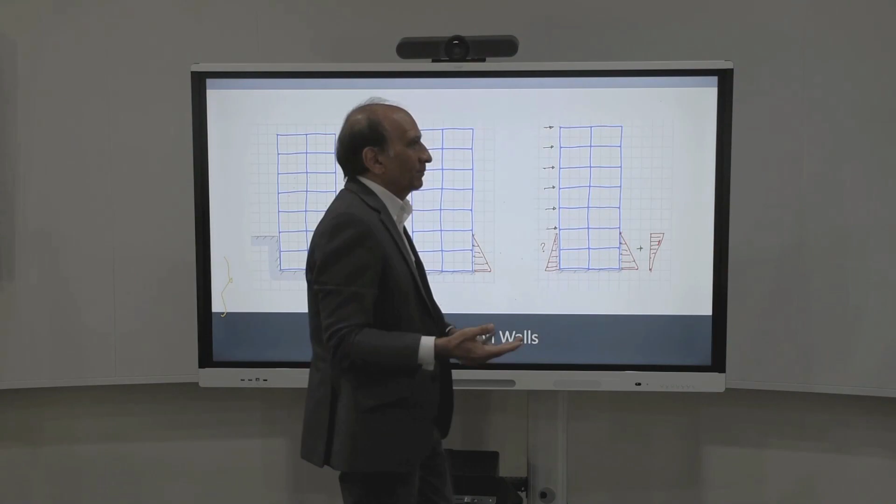And this side, we don't know what's going on. Is it going to separate from the soil? Is the soil going to move with the building? What's going to happen? And when the force comes from the other direction, what will happen then?

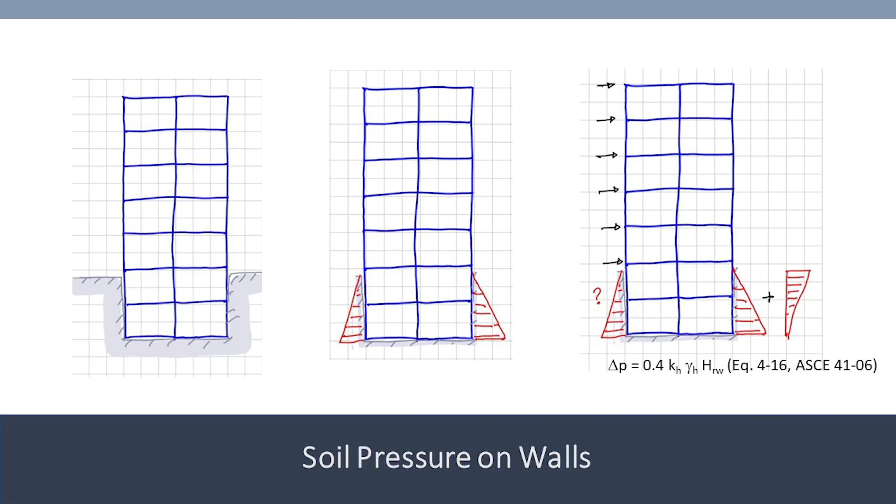So we can see easily that the basement is now in a state of stress which is not the one that we normally would assume. It will vary based on the lateral force. And there are formulas to calculate this passive pressure based on certain codes, and you can do that. So if you're going for earthquake, you can actually add that pressure onto the soil pressure, and you can account for that.

But then we come to another situation. Let's look at the plan of the same building, and we have soil all around that, right? So when the building starts to move in this direction, looking from the top, the front wall will try to stop it from moving.

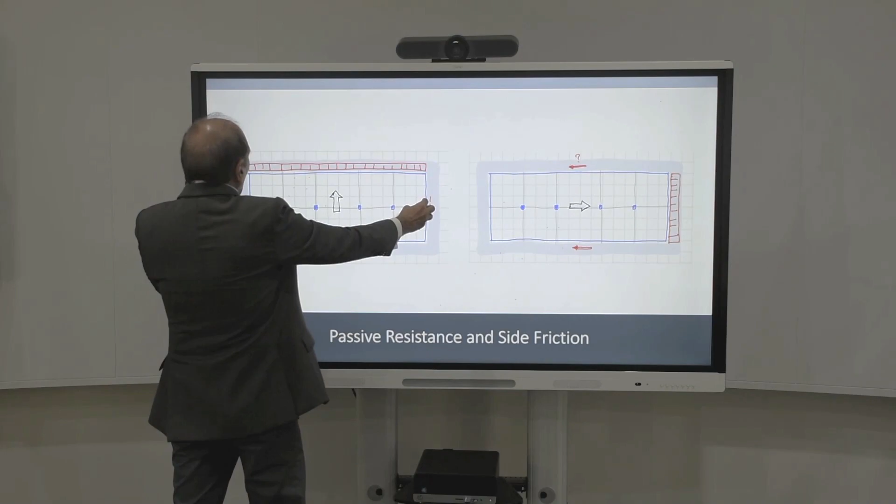And the sides of the wall here will have skin friction acting a little bit. This may be small compared to the resistance provided by the soil in the front. But if we move the building this way, then the front side is very small, but the skin friction side is very long. That means the contribution of the skin friction on the wall could be significantly more than the passive pressure developing on the front of the building.

So how do you account for that? How do you model this skin friction on the basement, which will not allow it to move in that direction? So many times we do not model these kinds of things, and we rely on these passive pressures to do the modeling. But things can get more interesting.

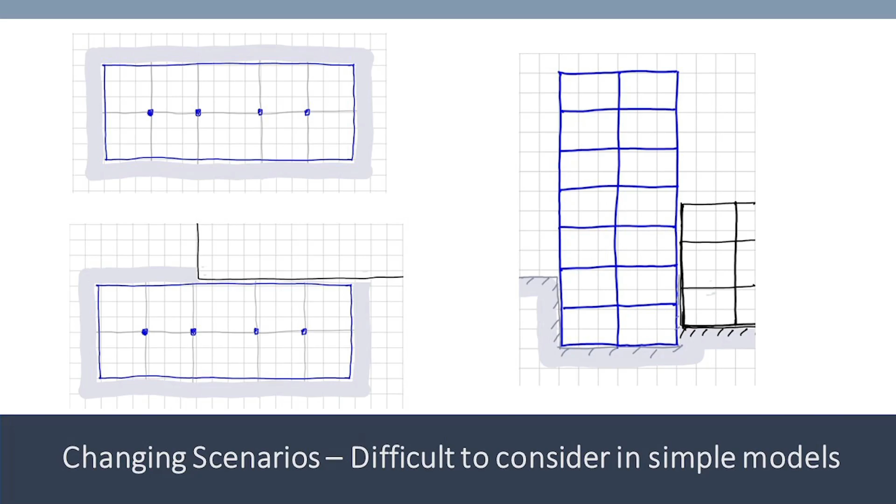Let's say in the beginning you made the building like this. Somebody came and bought that plot, and they removed that soil and put their building there. Then all the assumptions you made on the passive pressure and on the foundation are now gone, because suddenly that pressure is gone. Somebody made a building which is shorter, taller, or deeper than yours, then your soil resistance on that side is gone. How are you going to establish the stability of the building now on this side?

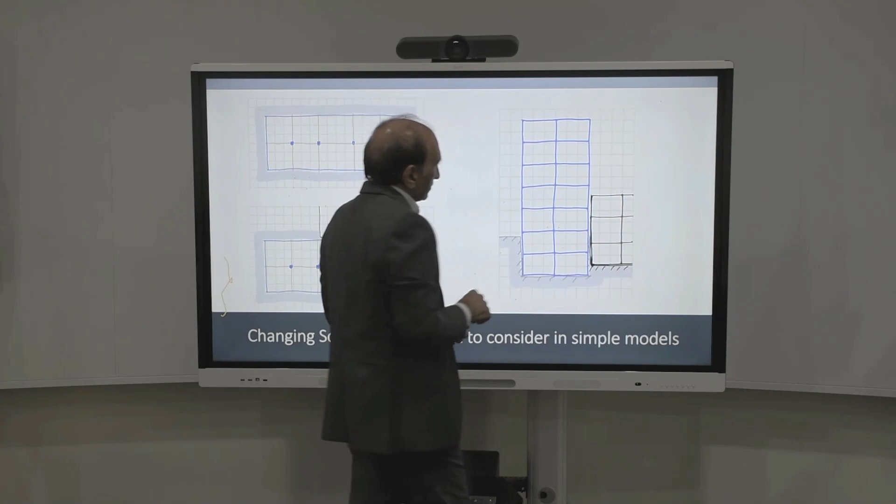And now your building might hit your neighbor. So you have to do impact analysis to make sure that your building doesn't hit your neighbor, or the neighbor building doesn't hit you. In many countries, there are rules that you cannot do that; you have to prove by analysis that your construction will not affect the existing buildings. But in many other places, these rules may not be available.

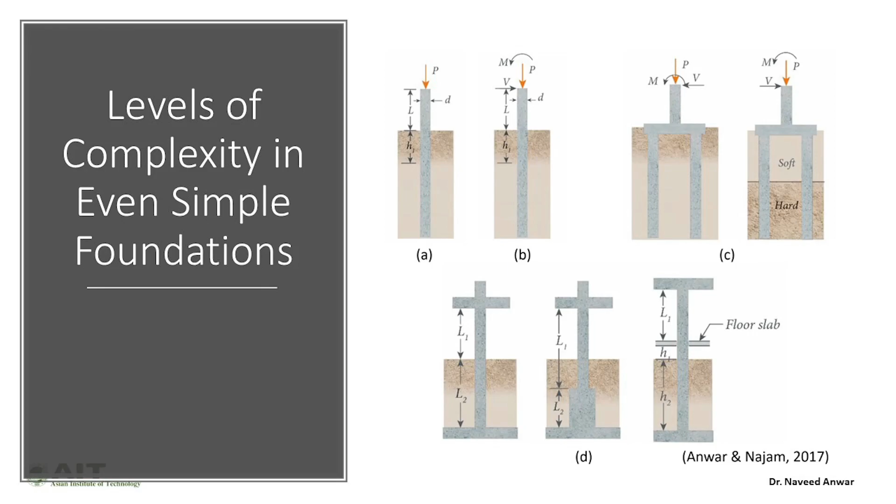So your structure may change its behavior over its life. And even for simple conditions like embedment of a column or a pile within the soil, we can create many different situations which will affect the effective length, the slenderness, the bending moments, and the lateral movements. So all of these things can actually complicate the analysis quite a bit. Unless we understand what's happening, we may not be able to estimate the response in a reliable manner.

So like I said, the purpose of today's talk is to just raise challenges, be aware of what challenges are there in modeling, and how far the modeling can take us, and how far we still need to have engineering judgment incorporated into our analysis.

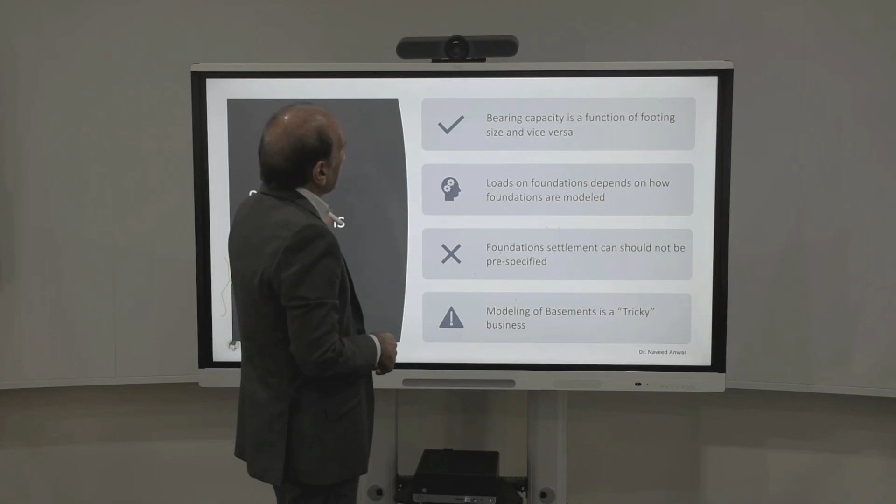Last few slides now. So what we can realize is the bearing capacity is a function of footing size, and we have to be aware of that. Loads on foundation depend on how foundations are modeled. Foundation settlement should not be pre-specified, and modeling of basement is a tricky business. You can make many assumptions about the basements, and you don't know what the future will do to the building. So we have to be aware of those.

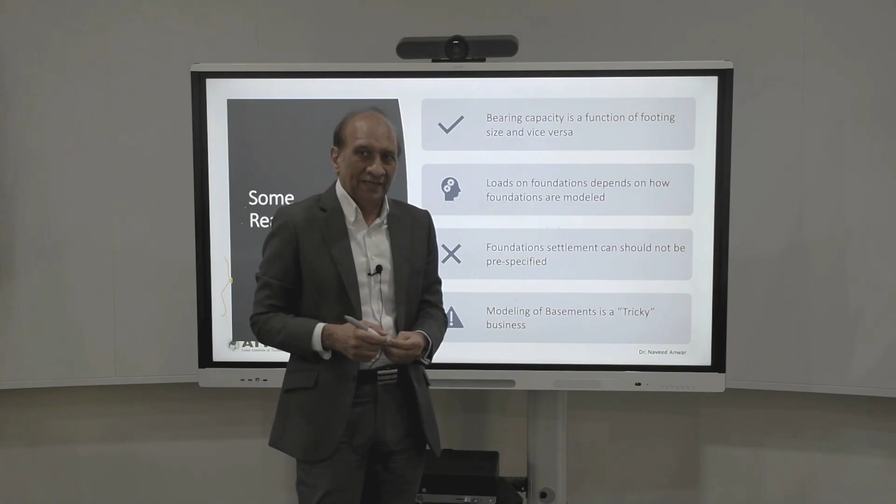The solution to all of these problems, as I mentioned, are the links: nonlinear links, springs and dashpots. A combination of a damper, which provides damping mechanism, a spring which provides the elastic response, and a nonlinear link which provides a nonlinear response. If you combine these three things together in the right order and configuration, you can model almost any behavior if you understand them well.

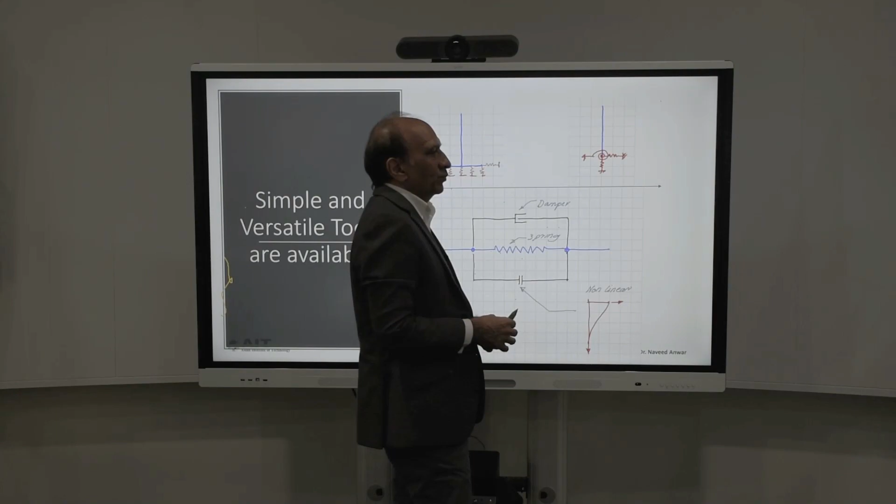This is the solution to all the problems that I have raised. Most of them can actually be handled by a combination of these three things together, putting them either in series or in parallel, depending on the behavior. So we will probably have a full talk on how we use these nonlinear elements to model many of the problems that I discussed.

As I mentioned in the introduction, there is an important aspect of the construction that needs to be modeled as well, which is the construction stages. As you know, structures are not built instantaneously, they are built over a period of time. So it is very important that we model this construction sequence and time duration into our analysis, especially for significant structures such as bridges and tall buildings, because this can significantly affect the results.

What happens in reality is that when you are doing the construction, whatever deformations take place at any construction stage are corrected before the next stage comes up. For example, if it's a tall building with uneven settlement or elastic shortening of columns and walls in a particular floor, every floor will be constructed level during construction. The previous deformations will not be continued. So those corrections make the structures be erected level and straight, which deviates from the analysis that we do.

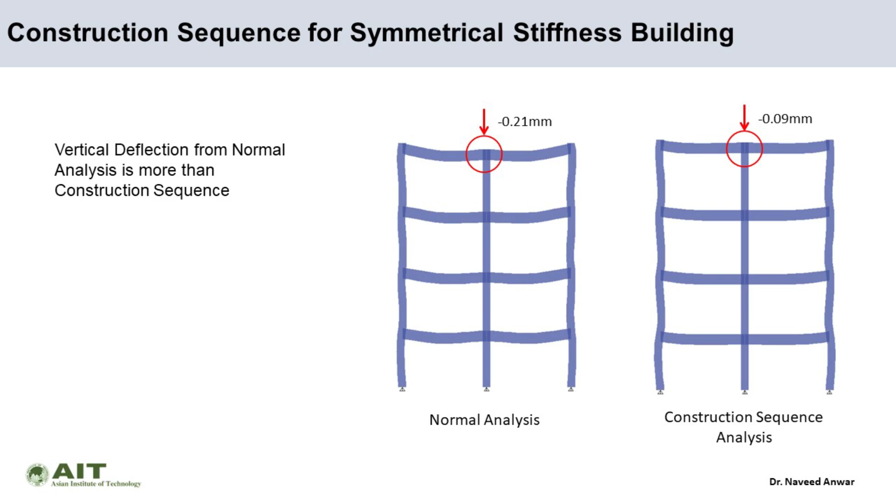If you look at a few examples, even in symmetrical structures, the deformations may be different between the central and exterior columns, depending upon the height of the building. This has to be accounted for by carrying out a construction stage analysis, which is not difficult these days. All you need to do is define construction stages in the nonlinear case and run it. Programs like ETABS do that very quickly, and you can simply run a story-by-story construction analysis.

The problem becomes more significant when the structures are unsymmetrical. For example, if you have shear walls on one side and no shear wall on the other, elastic shortening in the columns and walls will be different, and the structure may actually tilt. The results in a normal analysis will actually be incorrect, showing a large lateral deflection. But in reality that will not be the case, because during construction the structure will be built vertically, so those corrections may have to be done in the construction stage analysis.

This also becomes important when structures are built in stages and the formworks are removed in stages. For example, a transfer girder or transfer beam may be temporarily shored during construction and removed at a certain time. If you don't capture that, the forces in the transfer system will be incorrectly captured. So it's very important that we realize when the construction stage analysis needs to be done, and then perform that analysis in the appropriate programs, which these days have a lot of capability to do that.

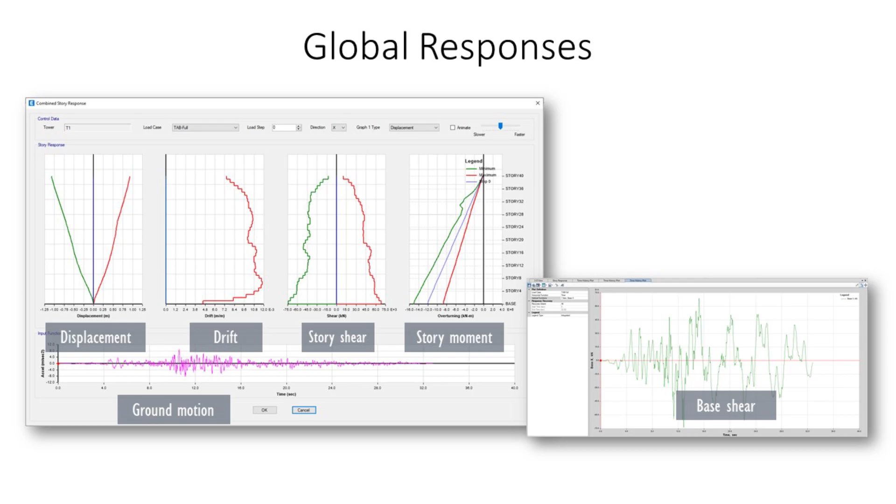The second part, which is related but also independent, is the dynamics, because the forces induced on the structure due to ground motion change with time rapidly, and because of that change, the inertial effects come into play. There will be interaction between the inertial effect, the modal response, and the time history. This complex interaction will alter the response of the structure globally as well as locally. When this dynamic response is combined with the nonlinear, we get to the complexity of doing a nonlinear dynamic analysis.

At present, this is considered to be the most accurate, or realistic, representation of the structural response. So whenever we compare any response determined from other types of analysis, we always try to compare them against a nonlinear time history analysis, because it captures the variation of the ground motion as expected.

In this nonlinear analysis, we often use the expected properties, not the design properties, which could be very different, and that can alter the results quite a bit. We capture the nonlinearity, the capacity-based design, the redistribution of forces, and so on, and it is captured at every time step as the structure continues through the history of its deformation and forces.

For tall buildings, we model the beams especially with nonlinear hinges, because they are the ones that deform or yield most, and we rely on that for energy dissipation and providing the required ductility. The shear walls we model using multiple modeling options—for example, nonlinear shell, fiber models, and other techniques. Combining beam nonlinearity and shear wall nonlinearity gives us the tool to capture the nonlinear behavior.

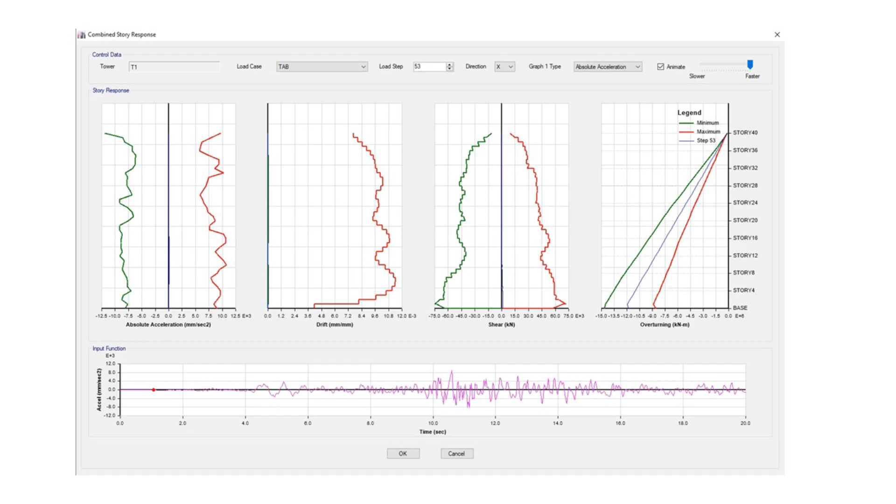Then we combine it with realistic ground motions, which we can determine based on the response spectrum of that particular site, or we can carry out a site-specific investigation to determine more realistic time histories in accordance with the geotechnical as well as seismic effects in the region—the soil, the bedrock, the source, and all of those things. So I think nonlinear dynamic time history analysis is the ultimate, combining all the issues I discussed, plus a lot more.

So when we are able to do that, we have reached, so to speak, the current state of the art in structural analysis and modeling. I hope this discussion will help us move towards more realistic modeling.

Now that we have seen some of the discussion on these topics, let me conclude by saying that it is not easy to model structures realistically and accurately, even simple ones, if we want to capture all the response. So in reality, what we need to do is first be aware that what we are modeling is not a true representation of the structure, and the results we get are only for the model we created, not for the structure.

Once we are aware of these limitations, we can make adjustments in how we interpret the results, and also how we adjust them through our engineering judgment. It's extremely important that we are aware of the limitations of our model analysis, and that we are able to take them into account when we do the final design.